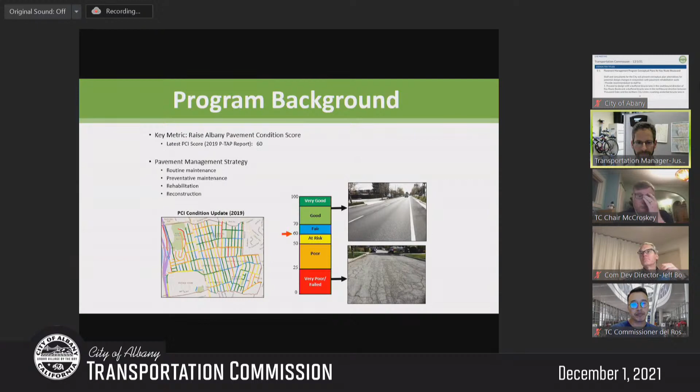The project being discussed tonight is part of Albany's street rehabilitation program. The primary objective is to improve and maintain pavement conditions in the city. The project also includes necessary improvements to roadways to achieve compliance with Americans with Disabilities Act requirements, which generally entails upgrades to non-compliant curb ramps. The current pavement project roadways were identified in the pavement management plan developed in 2019, and are the result of an analysis of current conditions, roadway treatment options, and planned utility work by the city and other agencies.

The current set of projects have been separated into 3 phases. The first 2 phases are currently in design, and at the June Commission meeting, staff identified several street segments for planning work to be presented to the Commission in advance of proceeding into design.

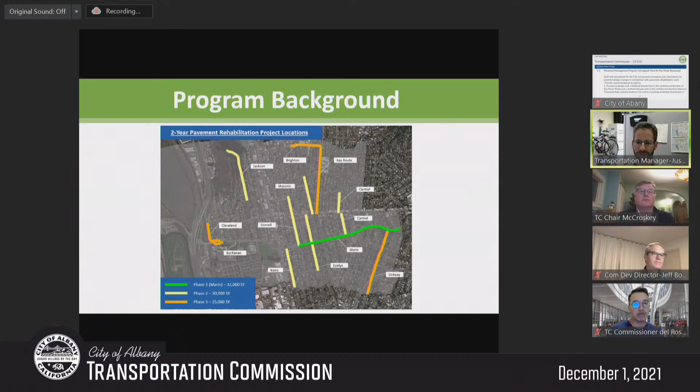These street segments were identified for evaluation of potential active transportation and safety improvements to be considered for inclusion in the pavement project. For Key Route Boulevard, the Albany Active Transportation Plan includes a Class 3 bike route as part of the proposed Fast Bikeways network. The ATP also includes a boulevard median walking path concept.

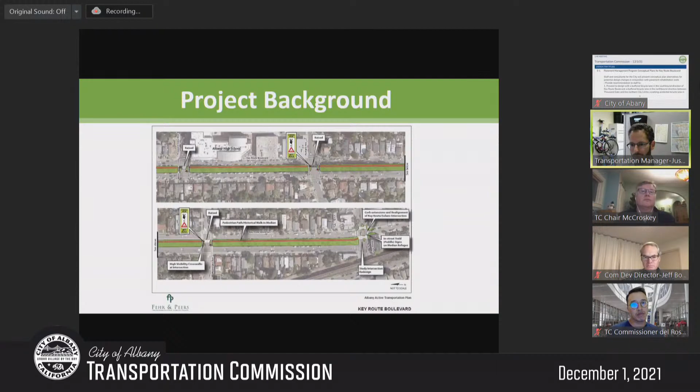There's also been previous design work the Commission has considered. At the December 2020 meeting, the Commission discussed and recommended median stops be installed along Key Route Boulevard, similar to what is now in place at the intersection with Brighton. This is intended to improve visibility and reduce the number of conflict points between movements through the intersection. Additional signage and striping improvements at the Key Route intersections were also recommended at that meeting and will be incorporated into the project design.

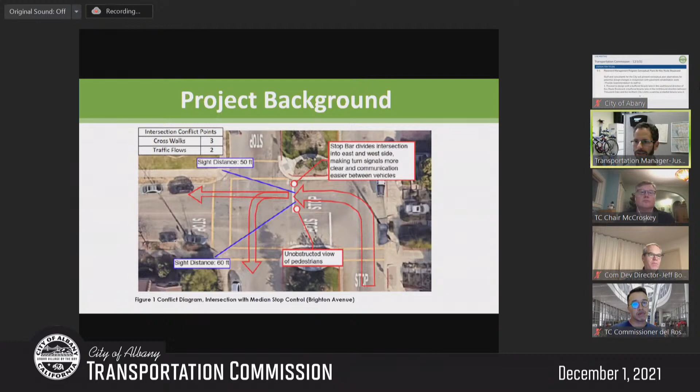Signage and striping plans were prepared for much of the on-street bicycle network in the active transportation plan. For Key Route Boulevard, these plans include a bicycle lane in the southbound direction and a shared vehicle and bicycle lane in the northbound direction. This design difference is due to differences in the roadway width in the northbound and southbound directions. This layout retains existing parking adjacent to the median in both directions. This configuration has not yet been installed and is one option for the street configuration for the upcoming pavement project.

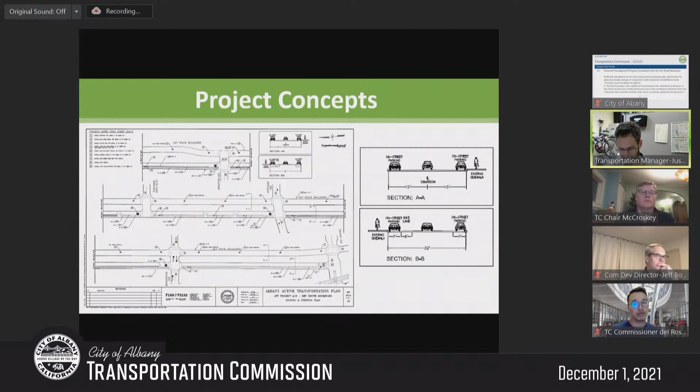And with that, I will hand it over to Andrew to talk about the other concept we're presenting tonight.

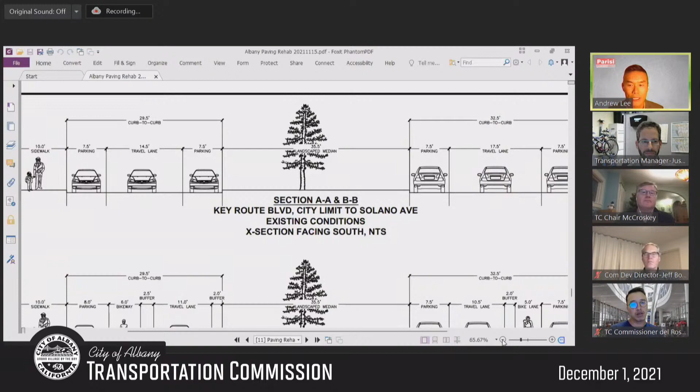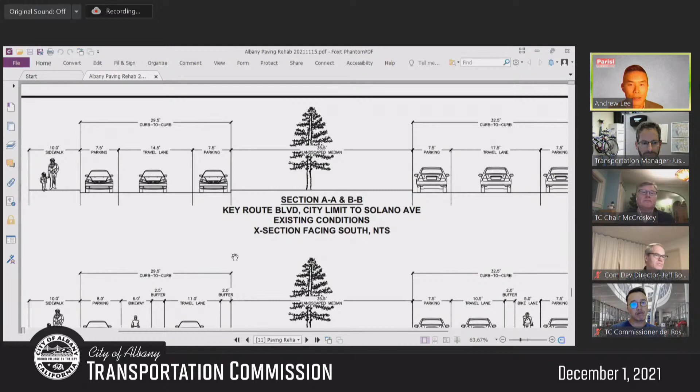So for Key Route, this item was presented last month, and this is a follow-up based on direction received from the Commission on other opportunities for bicycle lanes and bicycle separated bikeways on Key Route. As a refresher, this is the existing cross-section that exists from the north city limit to Solano Avenue, which is the south terminal for Key Route Boulevard.

This cross-section is looking south, and so on your left here are the northbound lanes. There is approximately 29.5 feet curb to curb width with parking on both sides and a 14.5 foot vehicle lane. In the southbound direction, it is wider by approximately 3 feet, so there's a curb to curb width of 32.5 feet there.

Based on Commission direction from last month's meeting, I'll start with the southbound direction, as that concept has remained constant to what you reviewed prior, which is that parking can be retained on both sides and an on-street bike lane between the parking lane on the right and the moving vehicle lane on the left can be installed. We're also showing a 2-foot buffer adjacent to this 5-foot bike lane. The buffer, depending on the situation, can be moved to the right or the left. We are showing it on the left as a concept.

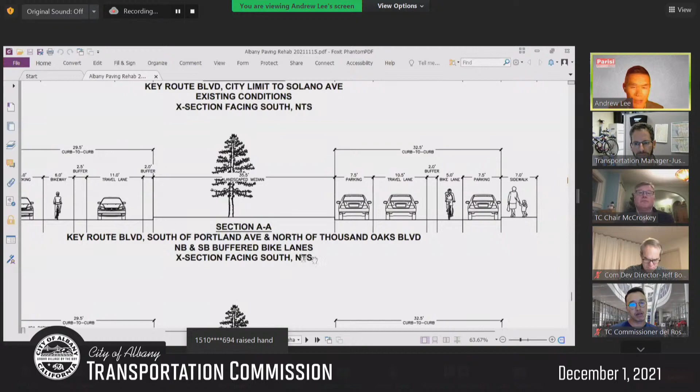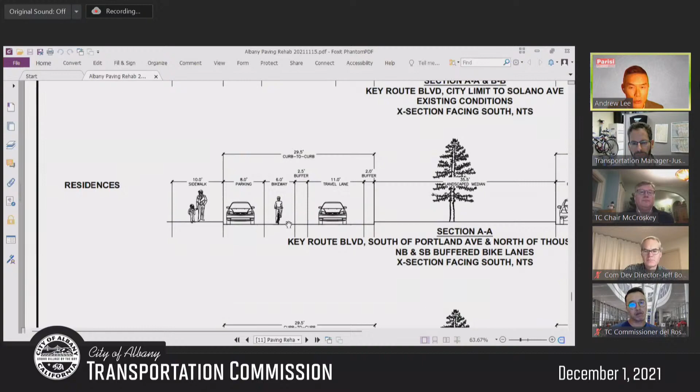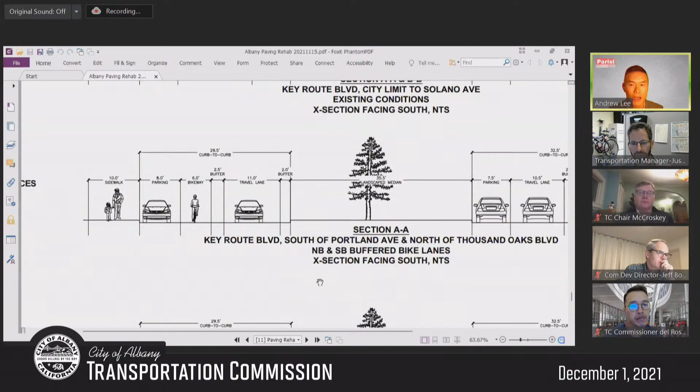In the northbound direction, we're modifying the proposal to remove parking on the median side. This is particular to the portion south of Portland Avenue and north of Thousand Oaks Boulevard. So these are the blocks not bounding Albany High School; they are the residential blocks to the north and to the south. With this proposal, it maintains on-street parking next to the residences.

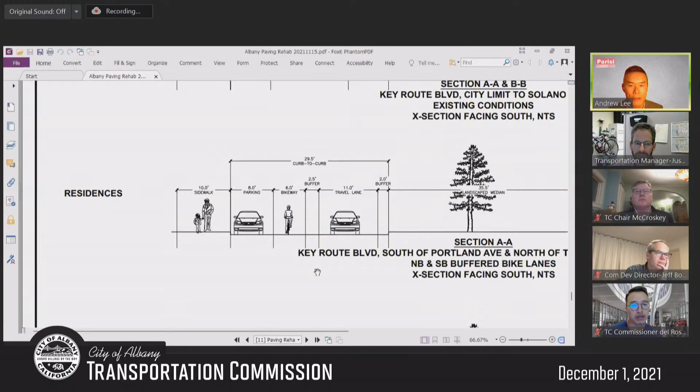The parking that would be removed—and this would be half of the parking along the block, in fact more than half—due to the presence of driveways on the residential side of the street, that median-adjacent parking would be removed. In its place, an approximate 6-foot bikeway with a 2.5-foot buffer can be installed, and this would move the moving vehicle lane to run median side. We're also showing a 2-foot buffer, which could be installed as a yellow stripe, so that the vehicle lane does not exceed 11 feet. However, the effective width would be wider due to the presence of the buffers.

In the section that is adjacent to Albany High School, this concept changes in the northbound direction. The southbound direction remains the same. The difference here is that the bikeway would run curbside next to Albany High in the northbound direction. There would be a 3 to 5 foot buffer depending on the type of parking installed, located between the bikeway buffer and the moving vehicle lane. As before with the prior concept cross-section, the on-street parking adjacent to the median would be removed, and instead the moving vehicle lane would be placed alongside the median.

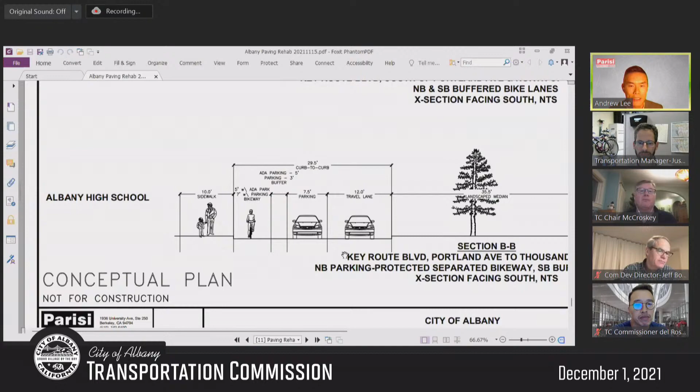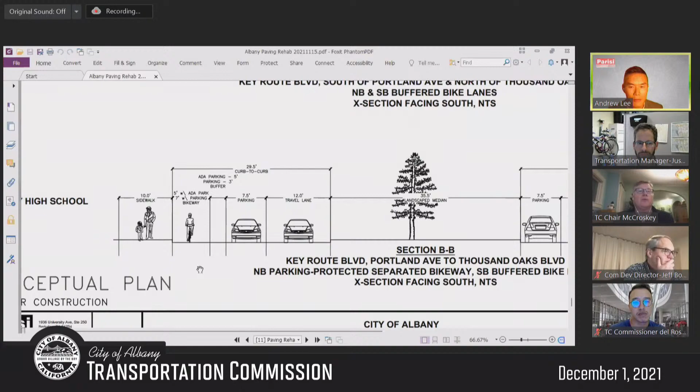Again, the parking along the northbound side of Key Route Boulevard would be removed in order to provide this bikeway, and I will let Justin talk about those potential parking impacts.

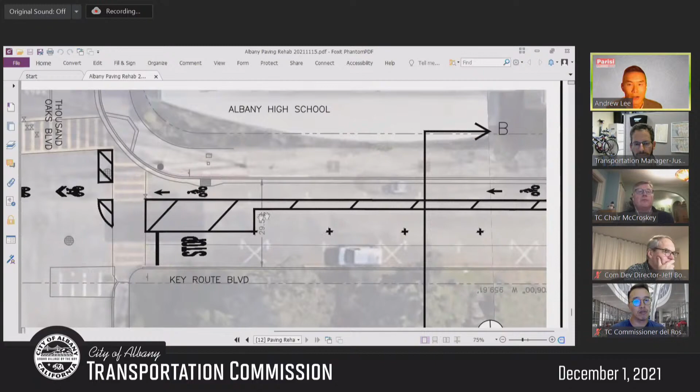This is the cross section, so I also want to show what these concepts look like in a plan view. And so I'm going to start in the section south of Thousand Oaks Boulevard. Actually, let me start north of Thousand Oaks Boulevard, excuse me.

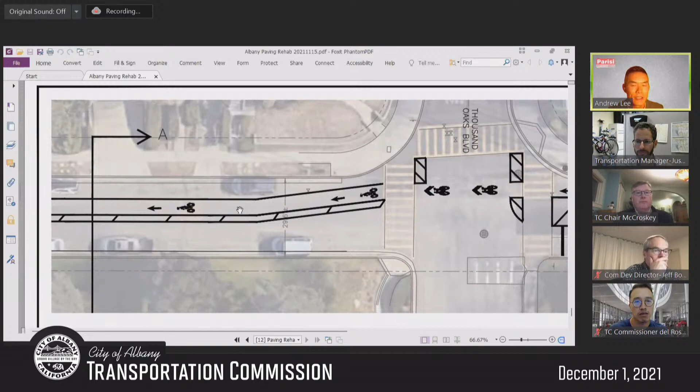This is the first cross section, and this is where the on-street parking running median side would be removed. In its place, the moving vehicle lane would take its place. There would be an on-street buffered bike lane placed between the moving vehicle lane and on-street parking, next to the residences on the east side of Key Route Boulevard.

I'll just jump over. This is the way it would look south of Portland Avenue. Again, the buffered bike lane between the on-street parking and the moving vehicle lane in the northbound direction.

Now I'll just talk briefly about what the intersections would look like. There is a transition that happens between a buffered bike lane, which is between moving traffic and parked vehicles, and how it transitions laterally into a bikeway where the bikeway would be running curbside.

This is adjacent to Albany High. There would then be a lateral buffer, which could be paint or posts or other features. And then on-street parking would be in this zone, which would then be adjacent to the vehicle lane.

So this concept affords a fair amount of protection for people on bike if there are people in cars wanting to make drop-off or pickup operations in northbound Key Route. And this concept is...

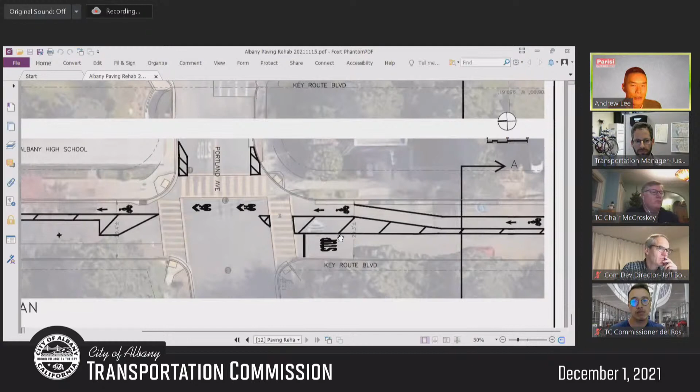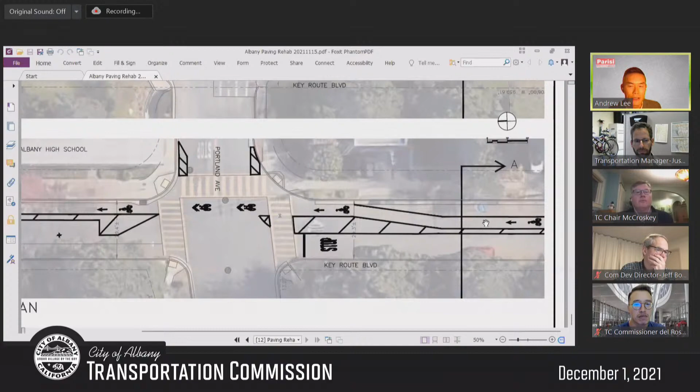More protective of people on bikes compared to an on-street buffered bike lane where, without the separation afforded by parked cars, there could be a fair number of people using the bike lane to make drop-off and pickup operations. And so this is unique to the block adjacent to Albany High.

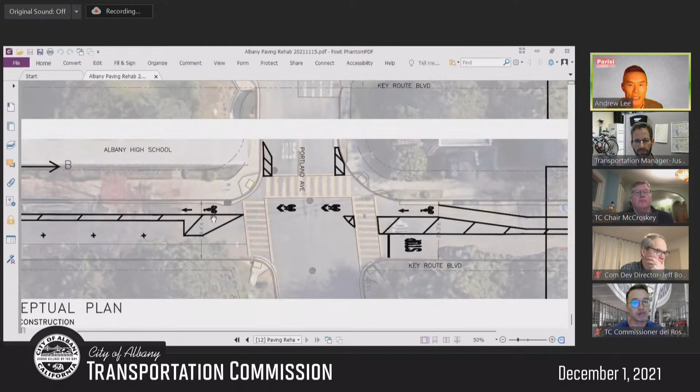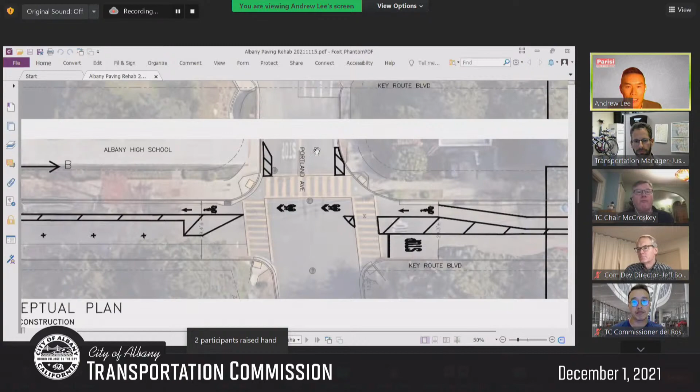Within the intersection here at Portland, and as I'll show you at Thousand Oaks, we are using a protected intersection style treatment, which has been developed over the past decade or so, which encourages a large lateral separation between turning vehicles so that somebody in northbound Key Route wanting to turn right has a large degree of separation from somebody on a bike, such that they can make a partial turn without encroaching fully into the bikeway, and being closer to the 90-degree approach at Portland Avenue can see out of the passenger side window and determine whether or not it's safe before proceeding through the intersection.

Mr. Lee? Yes. Is that all implemented or projected to be implemented with paint, or are there any other features?

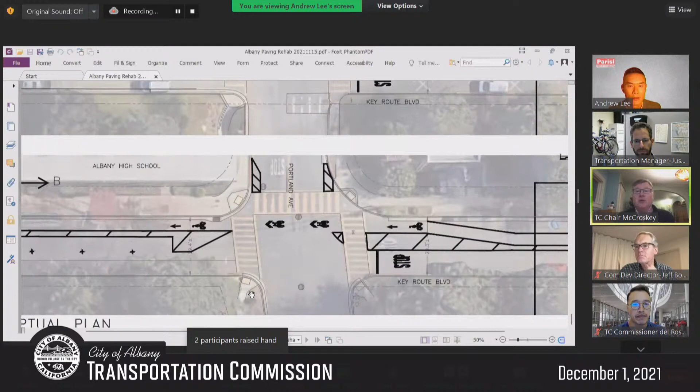Paint is one component, but it is more common to also have raised features. I have not shown them here, but they range from things as simple as plastic posts that are affixed to the ground and can be escalated up to concrete islands with concrete curbs, or other more temporary features that are bolted in, curb stop like features.

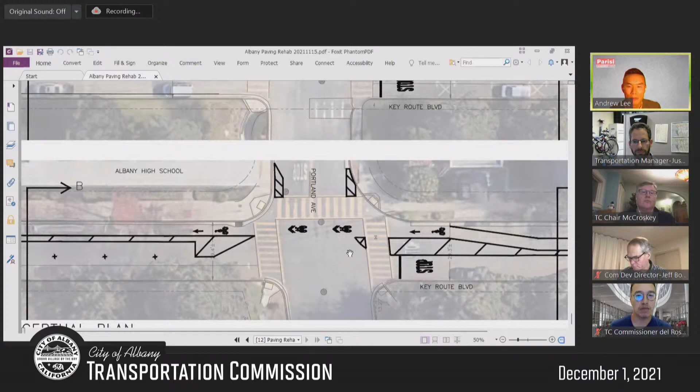But I certainly expect a raised feature component to be integrated in zones that I've marked with cross-hatching here, in order to encourage people in cars to not encroach into these striped zones and to be more aware and make their turning operations at a lower speed.

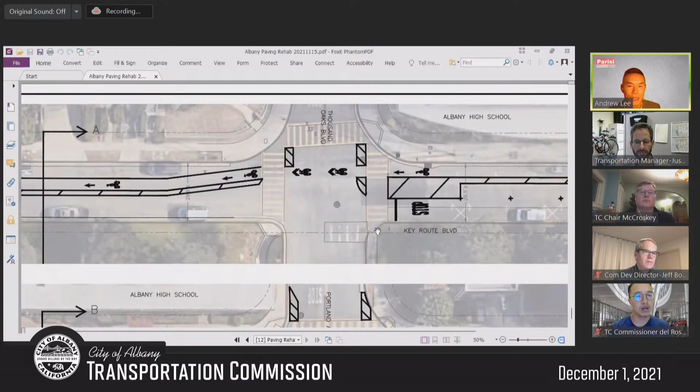It also affords a greater amount of separation for people walking, as a person in the crosswalk can make a multi-stage turn, making sure that there's nobody on bike, and then having a place of refuge before ultimately crossing through the vehicle lane as well. So there are multiple benefits with this type of design and having a more protected intersection style treatment.

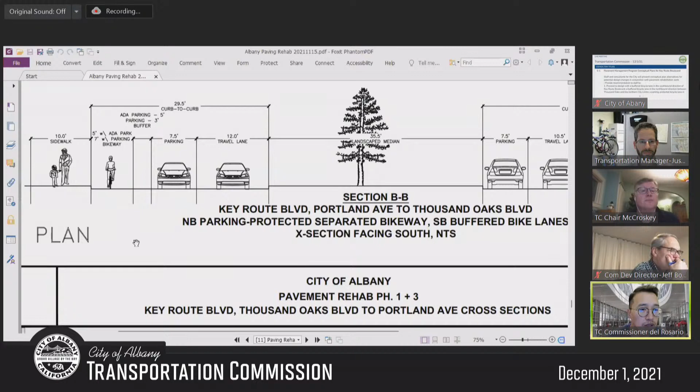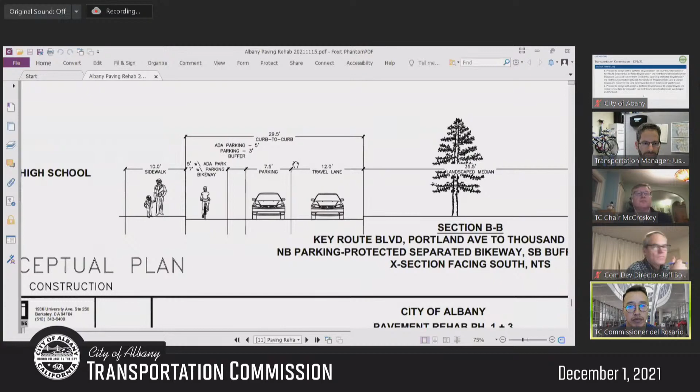Okay. So maybe the lane would go down to 10.5 or something like that. Okay, thanks.